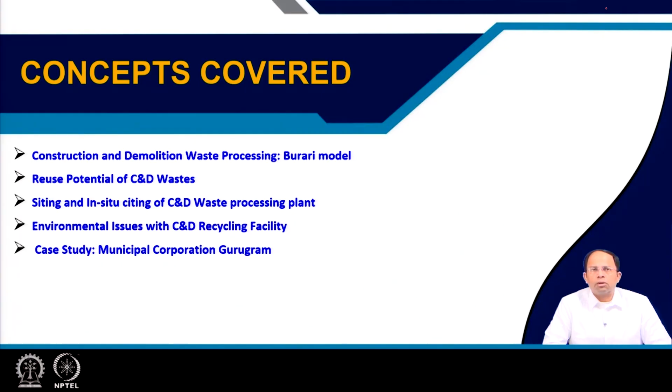So first we will talk about the Burari model. We have talked about this in the earlier lecture as well. It is a pilot project initiated by the Ministry of Urban Development, now Ministry of Housing and Urban Affairs, and this includes crushing units at Burari, which is Jahangirpuri in Delhi, and this is a C&D waste recycling plant.

This was initially set up by the Delhi Municipal Corporation, but now it's a part of North Delhi Municipal Corporation. Along with IL&FS, which is the Infrastructure Leasing and Financial Services company, they thought of setting this up in the year 2009. The agreement was done in PPP mode and on concession basis, initially for 10 years, and eventually it was extended.

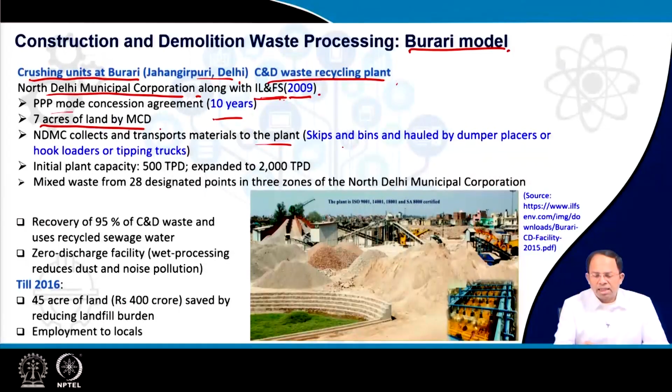7 acres of land was given by MCD, and this land was provided to the company IL&FS to operate on. NDMC collects and transports the materials to the plant, so it is the responsibility of the municipal corporation to collect the C&D waste and send it to the plant. For that, skips, bins, hauled and dumper placers, hook loaders, or tipping trucks are utilized as standard waste collection equipment.

The initial plant capacity was around 500 tons per day, and eventually it was expanded to 2000 tons per day. Mixed waste from 28 designated points in 3 zones of North Delhi Municipal Corporation was taken to this particular plant. As you can see, this is the plant operation, with different operations going on in different parts of the plant, and I will gradually discuss those.

Around 95% of the C&D waste is recovered and processed, and we can make it into other products. It also uses water because some processes require water, and in this case recycled sewage water was utilized. This entire facility is a zero discharge facility, but the technology used is called wet processing technology, which involves water at the end so that the amount of silt and other contaminants in the waste is reduced, and this also reduces dust and noise pollution from the materials being processed or prepared from the C&D waste.

Till 2016, as per estimates, around 45 acres of land which would have amounted to 400 crores was saved by reducing landfill burden, because by processing C&D waste we don't need more land for landfill. It has also given employment to locals, and in addition, money was generated by selling these products.

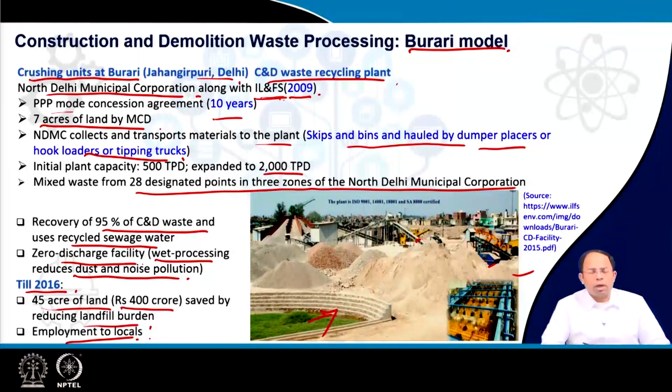Waste is first weighed to determine how much is coming in. Then initially, undesirable substances such as rags, plastics, metal, fiber reinforced plastic sheets, all these things are removed, followed by manual segregation of bigger plastic pieces. This segregation is done either manually or using some amount of mechanical means as well.

Manual segregation is done for bigger plastic and other pieces, whereas metallic objects, whether ferrous or non-ferrous, can be separated using different forms of electromagnets, as we have learnt earlier.

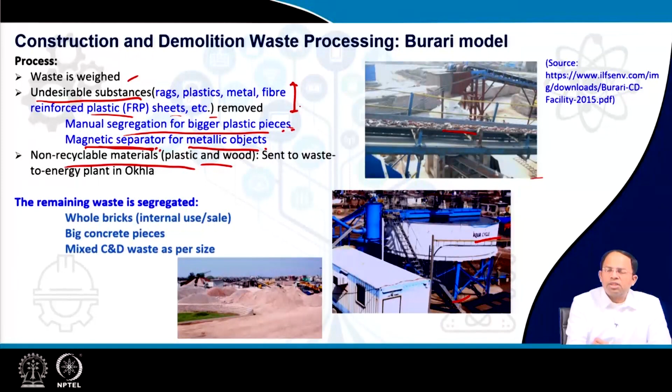Non-recyclable materials such as plastic and wood recovered from this waste are sent to the waste-to-energy plant in Okhla, which we have learnt about in earlier case studies.

The final waste, after removing all this undesired material, remains in three categories: whole bricks, which are used for internal use or sold; big concrete pieces; and mixed C&D waste as per size. Big concrete pieces are chunks of concrete, while mixed C&D waste is a mix of bricks and concrete. This can again be subcategorized as per the size of the particular materials.

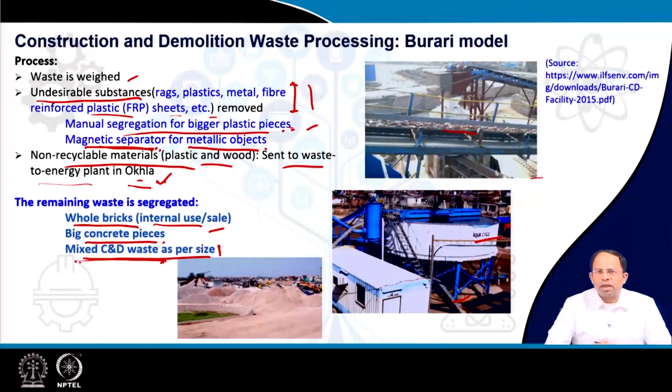Now, coming to the processing technique and methods applied. There are usually two processes: the dry process and the wet process.

In both processes, we first remove the loose soil that comes along with the C&D waste. Then the waste is crushed and screened in multiple stages, giving different sizes and grades of product. In the wet process, even after all the dry processing, a lot of silt and sand still remain in the final products. So to get rid of this silt and to overcome the loose soil and grit contamination, the wet process is done.

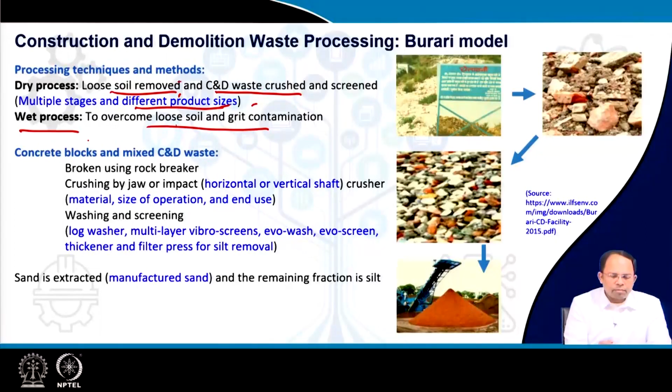How is it done? First, for concrete blocks and mixed C&D waste, these are broken using rock breakers, the equipment used to break waste into smaller particles. Then crushing is done by jaw or impact crusher, which could be horizontal or vertical shaft type, depending on the material, size of operation, and the final end use required. Depending on that, we determine what sort of jaw or impact crusher to utilize.

Finally, we wash and screen the waste with water. This is done using log washers, multi-layer vibro-screens, Evo wash, Evo screen, thickeners, and filter press for silt removal. This is where washing happens, this is where crushing happens, and this is where the first breaking happens. After breaking, we crush it into very small particles, then wash it to remove the silt and similar materials.

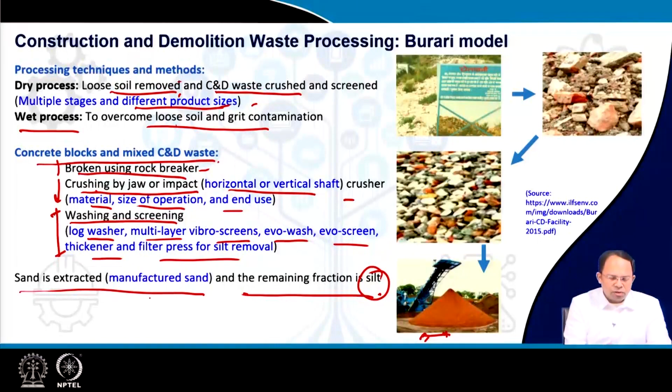Sand is extracted as manufactured sand, since we are crushing the material into very small particles, and the remaining fraction is silt. This is the final material coming out, and whatever is left, the silt, could eventually be utilized for other construction purposes.

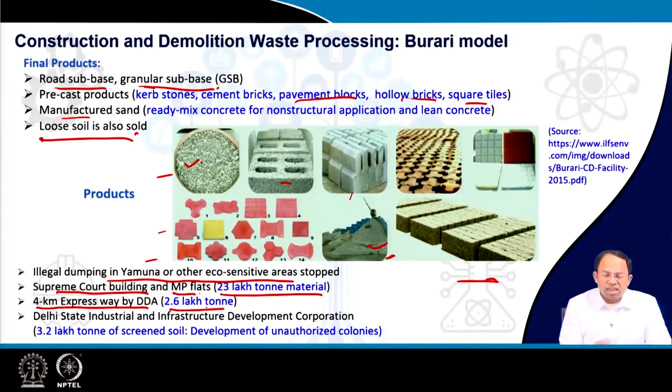Now coming to the final outcome of this project: because of this project, illegal dumping in the Yamuna river and surrounding eco-sensitive areas was stopped, and the Supreme Court building and some member of parliament apartment building blocks were created using this material. 23 lakh tons of this material was utilized there. A 4 kilometer expressway by DDA was also constructed, using 2.6 lakh tons of this material.

The Delhi State Industrial and Infrastructure Development Corporation utilized 3.2 lakh tons of screened soil for the development of unauthorized colonies. So this project has turned out to be a very good example which could be repeated in other parts of the country.

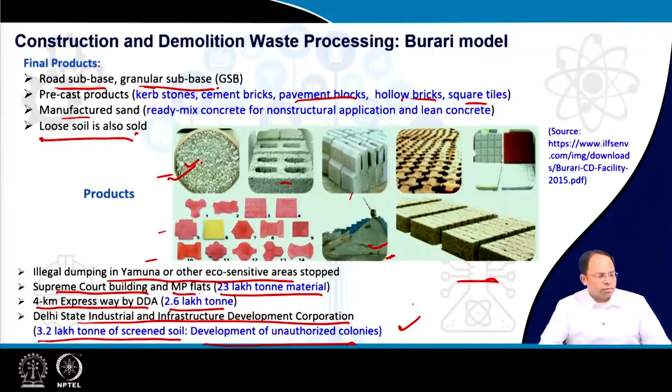So use of recycled aggregates could be the use of this particular material. Definitely, when we make aggregates out of C&D waste, we reduce the natural resources that would have otherwise been used for creating these aggregates.

One problem is sand mining from riverbanks, which is leading to erosion and flooding in certain areas. So this kind of practice will reduce the demand for sand mining. It will reduce the burden on the landfill site, the landfill area requirement, and finally it will enhance the conservation and save overall urban land. So these are the general benefits of C&D waste.

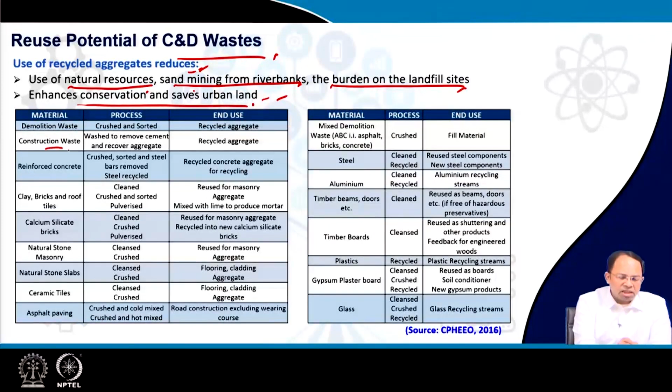But now coming to specific kinds of C&D waste like construction waste, demolition waste, reinforced concrete, calcium silicate bricks, natural stone masonry, you can see that these are the different processes which are adopted. For example, for ceramic tiles, we have to clean it and crush it, and then it could be used for flooring, cladding or aggregates. For demolition waste, of course, we have to crush and then sort it, then it can be used as recycled aggregate.

Then clay bricks and roof tiles could be cleaned, crushed, sorted and pulverized, then used for masonry, used as aggregate, or mixed with lime to produce mortar. And then coming to this side where we have steel, we can clean and recycle it and then reuse steel components, and new steel components can be prepared from that. Aluminium, exactly the same, we can recycle it completely.

Then these timber, wooden beams and doors could be cleaned and reused directly, right? And then some plastics could be put into the plastic recycling streams. The glass could be cleaned, crushed, recycled, and then we can have glass recycling streams as well.

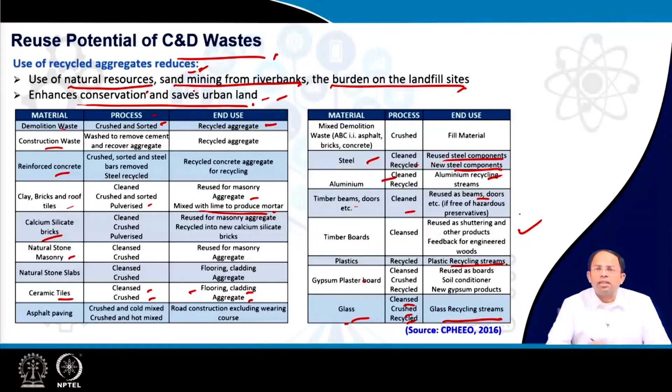So you can see that a lot of material that is generated could be utilized in different ways, and not only the concrete and all these blocks, but also metals, glass and whatever is generated from demolition sites or construction activities, we can actually utilize it or recycle it as we have discussed earlier.

So then coming to siting of this kind of waste processing plants. Along with siting, we will also talk about in situ siting, that is wherever the demolition is happening, we can set up our processing plant over there, or in general terms where we will site it. Now, land use plan.

So usually the town and country planning department or the urban development department of the state government is the authority responsible for allocating land for these processing plants. Now usually the location choice depends on many things. It depends on logistics, land area available, and what kind of emissions are coming out from the site. Is there dust emission, noise emission and so on. So those rules remain the same for setting up any kind of recycling facility.

In general, we will set up this kind of plant in an industrial area, and it should be adjacent to a landfill site, so that the rejects could be directly taken to the landfill site. And if possible, we have to also go for in situ processing plants. This will reduce transportation cost and also the overall environmental burden.

Now, one rule in the C&D waste management rules is that we have to create certain buffer zones around this kind of processing facility. For example, when plants are less than 500 tons per day, the buffer zone should be 20 meters. Whereas if it is more than 500 tons per day, then we have to have a buffer zone of 30 meters around the plant.

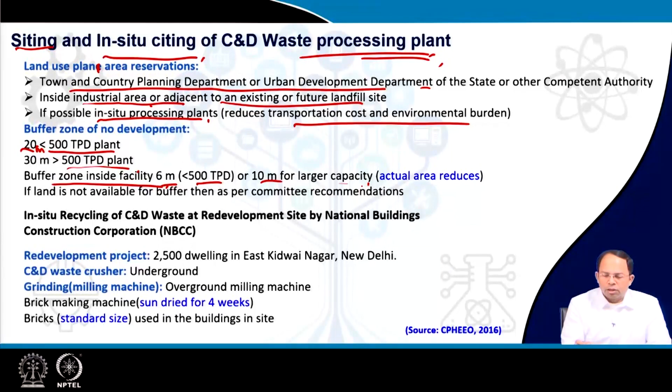Now, inside the zone, we also require a buffer zone. That is around 6 meters for a small plant, which is a less than 500 ton plant, and 10 meters for a larger capacity plant. So the actual area available for operation or setting up buildings is less than the site area that you choose. So if I have a site area like this, we have to keep a buffer of 6 meters or 10 meters accordingly, and then create everything else inside this facility. So that is how you determine what area should be reserved for setting up this kind of processing plant.

So if land is not available for a buffer, maybe because it's a very densely packed area, or there are other land uses surrounding it, like other industries, which is not a problem in terms of emission, in that case a committee is formed, including people from the CPCB, the Pollution Control Board, and the Pollution Control Committee, who usually give recommendations on the final approval for setting up this kind of plant.

Now, as we have discussed, in situ is always better because of reduction in transportation cost. So, National Buildings Construction Corporation NBCC has developed an in situ C&D waste recycling plant in one of its redevelopment sites. This site is at East Kidwai Nagar in New Delhi. It includes 2,500 dwellings which need to be redeveloped.

So, a lot of C&D waste is generated because first you have to demolish, and a waste crusher is set up underground so that dust and all these things don't spread too much. And then there are grinding and milling machines which make it into smaller particles, which are set up overground in this particular area.

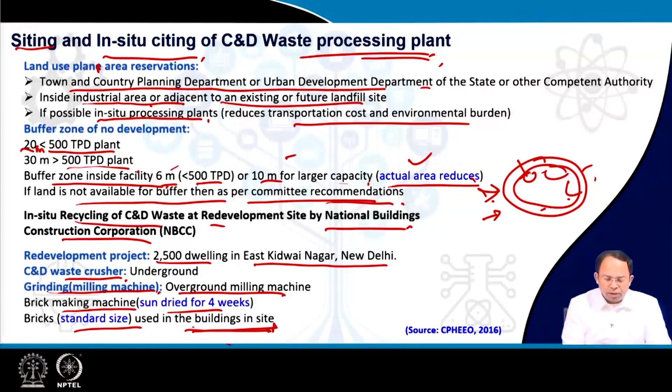Now, there is also a brick making machine which makes sun-dried bricks, which take around 4 weeks to mature. And standard size bricks are prepared, and these are used in the same buildings for development. That means in the same site they are doing a lot of development where new buildings are being constructed. So, all these are utilizing the bricks which are generated over here.

So, some of the environmental issues of C&D recycling facilities also remain for in situ plants as well. So, we have to be very careful. Now, there are different activities like site clearing, site operations, or contouring operations that permit water to be ponded on the site, or uncontrolled or poorly managed site runoff, asbestos contamination. So, these are different aspects, and each of them results in certain potential issues, like site clearing results in dust and noise, loss of biodiversity maybe.

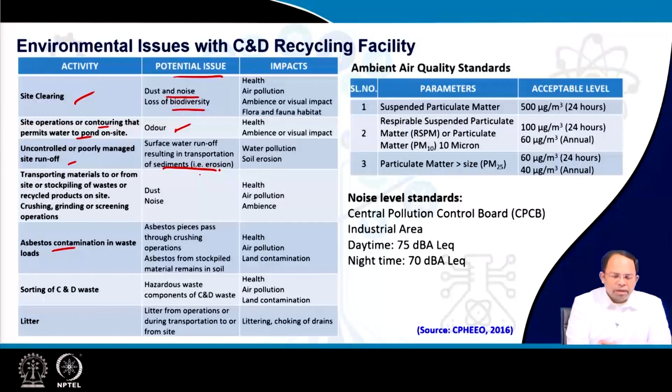Then site operations, these ponding operations may result in some odor. Then uncontrolled or poorly managed site runoff results in transportation of sediments or erosion, which leads to water pollution and soil erosion. Similarly, dust and noise lead to health, air pollution, ambience or visual impact, and flora and fauna are impacted based on loss of biodiversity.

So, transportation of materials to and fro from site and stockpiling of waste and recycled product leads to dust and noise. This is the primary concern. This leads to health problems, air pollution, ambience is also lost, and so on. So, sorting of C&D waste, hazardous waste components of C&D waste may cause health issues, air pollution and land contamination. And litter is spreading of the dust by wind and so on. So, it could lead to choking of drains and general littering of site, which is not aesthetically pleasing.

Now, for this we have to regularly monitor these kinds of sites, both in situ sites as well as separate sites. So, the ambient air quality monitoring standards have to be followed. Suspended particulate matter, RSPM, different kinds of particulate matter are being measured, and you can see these are the values, acceptable levels.

And similarly, for noise level standards, it's similar for industrial areas, and as given by CPCB during daytime, the maximum noise allowed is 75 dBA Leq. So, this is the acceptable averaged decibel level, and for night time it is 70 dBA. So, this is what we have to be careful about when we are setting up these kinds of facilities.

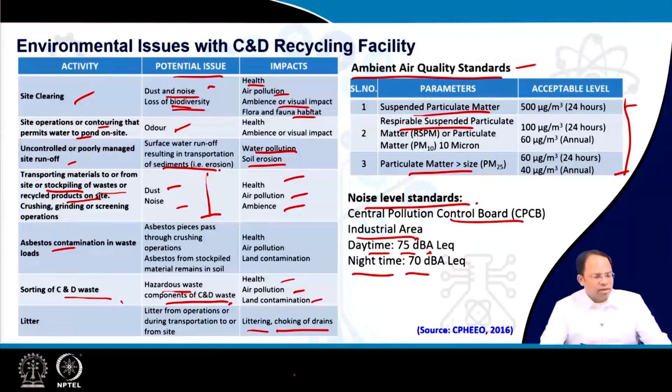So, it's not only making facilities for C&D waste processing, but at the same point of time we have to deter people. So, that means there has to be some amount of penalty for these kinds of activities, and also in cases where people are doing construction and not informing the government, there definitely have to be penalties. So, usually for non-disclosure, the penalty is around 25,000 or 25% of the overall assessment of that property, whichever is lower. And night patrolling and complaints are registered.

That means people can complain if they see something, and night patrolling is taken up intensively so that people are deterred from generating this kind of C&D waste and then throwing it away just like that. So that has been done in Gurgaon. So it's not only the positive things, but also some amount of strictness has to be there to prevent this kind of disposal activities.

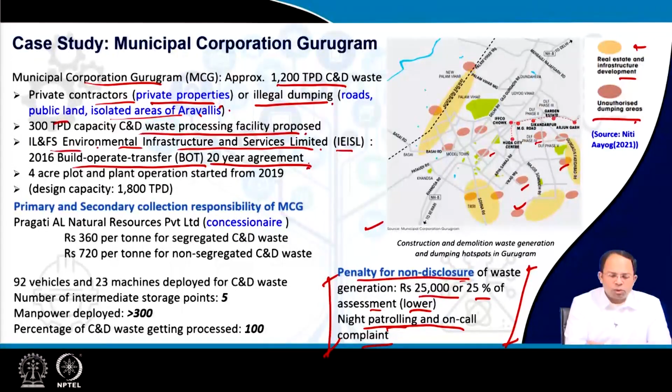They have done a 20-year agreement for this kind of C&D waste processing, and initially they started with a 4-acre plot, and the plant was constructed and started operating from 2019, and the design capacity of the plant was around 1800 tons per day. They started with 300 tons per day capacity initially, and then eventually they were able to increase that to the full amount of waste that is being generated in the municipal area.

One of the main problems with this kind of project is the primary and secondary collection system for C&D waste, because C&D waste is bulky, it is heavy, it's difficult to transfer. Plus it has to be done as per real-time requirement. That means somebody will book that their C&D waste has to be picked up from a site, and then we have to send vehicles. So all this detailed planning needs to be done.

Pragati AL Natural Resources Private Limited was a company taken under a concessionaire contract, and they were paid around 360 rupees per ton for segregated C&D waste and 720 rupees per ton for non-segregated waste to collect and transfer this waste to the processing facility.

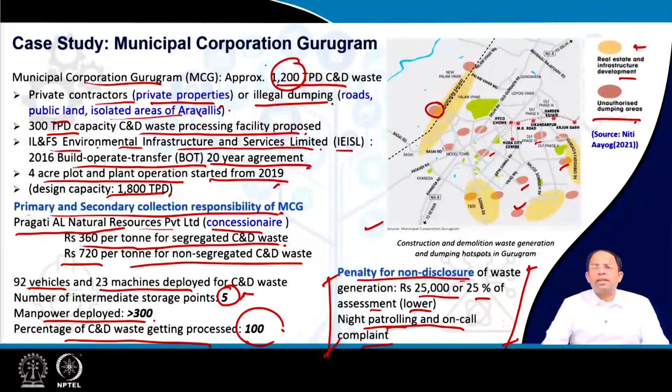In total they deployed around 92 vehicles and 23 machines, and the total number of intermediate storage points used in the city was 5. Initially it was planned to be around 13, but ultimately 5 became operational. Total manpower deployed was more than 300, and the percentage of C&D waste that got processed is 100%. That means the entire 1200 tons per day of waste was actually processed.

As for the process and method employed, as you can see, there is a crusher for the C&D waste plant. This is the Basai plant. Waste was initially inspected and weighed, with a computerized billing and vehicle tracking system for payments, since you have to measure how much waste is coming in. Then the plant has an unloading area where waste was unloaded, and from that waste, wood, steel, plastic and bituminous materials are manually segregated and sold to recyclers. So this is the first waste stream.

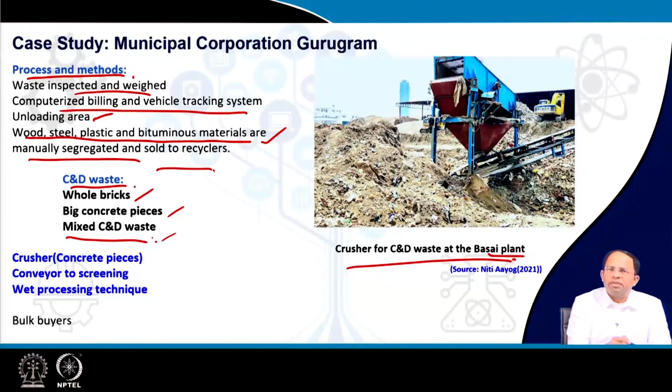The 3 other waste streams, after segregating these other materials, were whole bricks, big concrete pieces and mixed C&D waste. This is almost the same as the previous Burari plant. Then crushers were utilized where the concrete was broken into pieces. Conveyors were utilized for screening this broken material, and then a wet processing technique similar to the Burari plant was used for cleaning the waste, to separate the different aggregates and the finer materials. Finally, bulk contracts were done with bulk buyers to sell off this material.

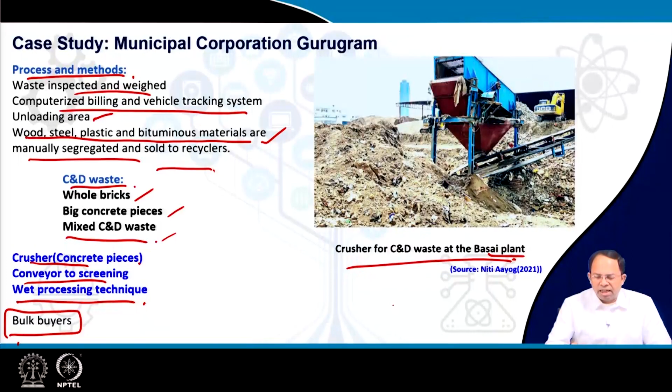So to conclude, C&D waste collection and transportation needs to be planned carefully. An effective and smart C&D waste collection and grievance system with penalty goes a long way in making the entire process efficient and sustainable. Thank you.